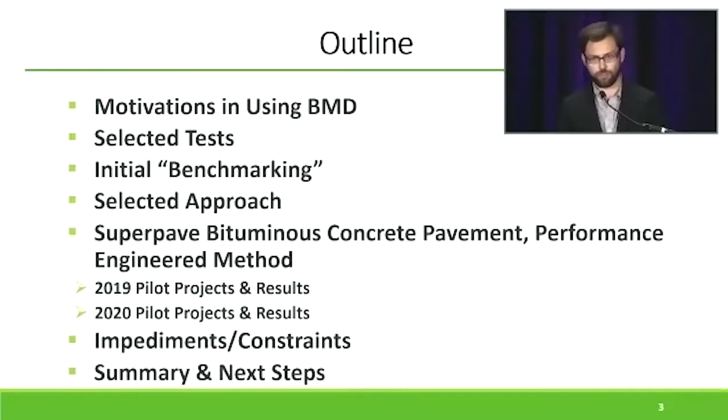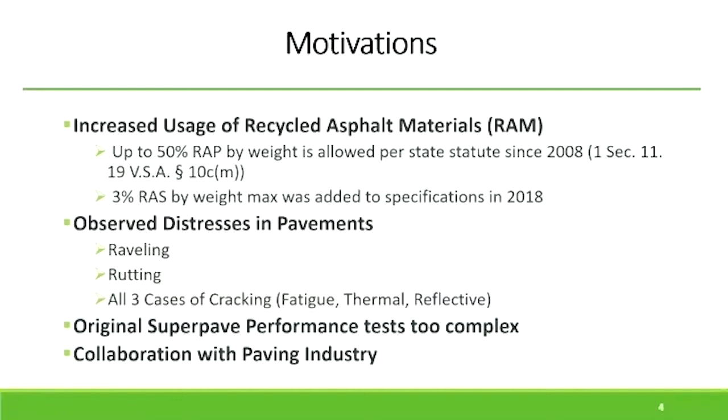So the question is, why did we decide to move ahead with balanced mix design? Since 2008, under state law, we are required to allow up to 50% RAP by weight in our asphalt mixes. Since 2018, we have allowed up to 3% RAS by weight in our mixes as well. It's worth noting, as I will indicate later in this presentation, that most mixes have no more than 20% RAP in general because we have grade bumping requirements in our PG binder specification.

In addition, we were also seeing various distresses in our asphalt pavements, mainly raveling and rutting on our limited access highway system, our interstates basically. We were also seeing all three cases of cracking: fatigue cracking, thermal cracking, and reflective cracking. This is because we are, I like to say, an unintentional composite pavement state on our regular roadways, because there are concrete slabs dating back from the 1930s and 1940s placed below the asphalt pavement layers. And as most of you can attest to in the room, what we found with the original performance tests developed with the Superpave mix design methodology was that they were too complex and the equipment was too expensive. So in Vermont, we only implemented the volumetric aspects of Superpave.

And lastly, and most importantly, we wanted to increase the amount of collaboration that we have with the asphalt producers and amongst ourselves, because we share a common cause: ensuring that the right materials are used at the right cost and at the right time.

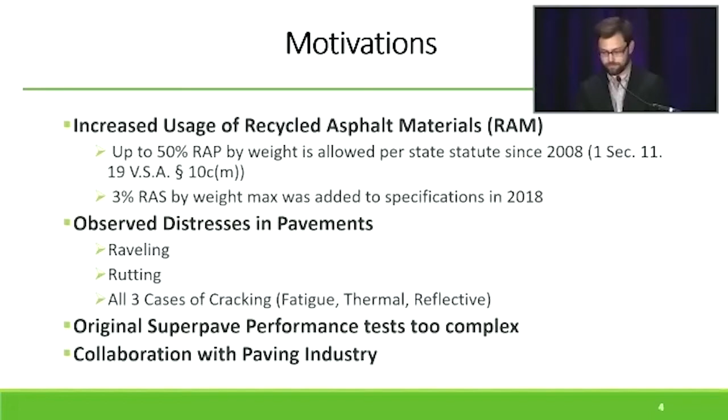Now I'll talk about the balance mix design tests that we chose. In 2015, we purchased the Hamburg wheel tracker and chose that test to evaluate rutting and moisture susceptibility, primarily because it is a torture test in principle on HMA mixtures.

We suspected that raveling was moisture susceptibility related. In addition, we also shared a mutual dislike with the asphalt paving industry in Vermont regarding the TSR test parameter performed in accordance with AASHTO T283. We thought it did not reflect the actual moisture susceptibility and stripping issues we were seeing in Vermont.

For the cracking side of balance mix design, we chose the Illinois Flexibility Index because it was identified as a candidate test for thermal and fatigue cracking in NCHRP project 9-57. At the time we made this decision in 2017, we were anticipating an increase in our recycled asphalt materials content, particularly RAS, which we did implement in 2018, as I noted before.

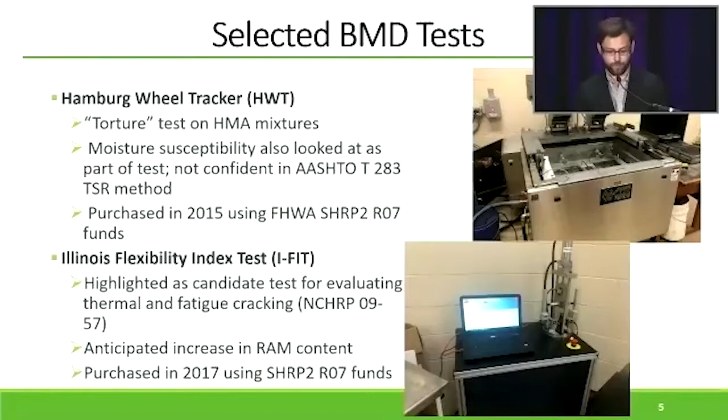We did look at the other two SCB tests, the Louisiana and Minnesota tests, but found them unsuitable. The Louisiana SCB is not used outside the southeastern US, and we considered the Minnesota SCB test too expensive for what we needed, because it would require purchasing an environmental chamber.

Next I'll talk about benchmarking, and upfront I'll say that benchmarking has been the most challenging aspect of incorporating balance mix design in Vermont.

We began sampling plant-produced mixtures in 2015, soon after we purchased our equipment. Essentially, we reheated specimens up to compaction temperature.

Initial specimens were gyrated to 60 millimeters per T324, the AASHTO procedure, but since last year we've been gyrating to 62 millimeters per feedback from our paving association meetings.

We initially did testing at various temperatures ranging from 40 degrees Celsius to 55 degrees Celsius, but then in 2016, FHWA suggested we test all specimens at 45 degrees Celsius due to the climatic conditions in Vermont and to align with procedures in neighboring states, Maine and Massachusetts.

After we presented our initial data in the winter 2017 meetings with our paving association, the producers began split sampling plant-produced mixtures and following the same fabrication procedures we were using, assuming they had Hamburg equipment in their labs. Almost half of the producers as of this year now have Hamburg equipment in their possession.

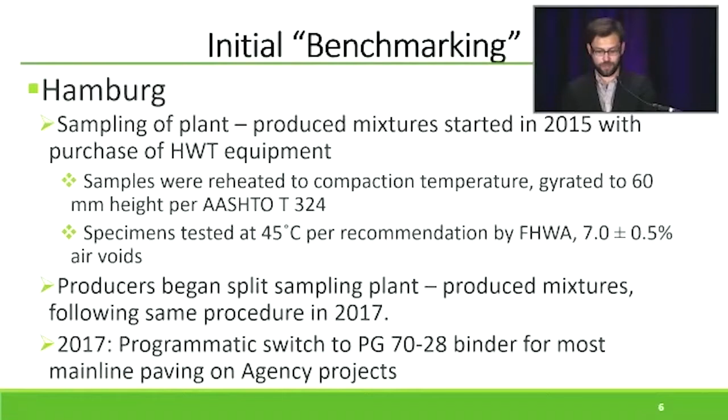Also in 2017, there was an executive level decision to mandate the use of polymer modified binders for all agency paving projects moving forward. Because of concerns in our paving association meetings regarding the MSCR test at the time and tank storage requirements, we decided the simplest path forward was just to specify PG 70-28 binder as a baseline.

Allow me to go over the 2015 and 2017 data briefly. Most of the data from 2015 and 2017 consisted of varying PG binder grades, as indicated on my slide. All the data from 2015 wasn't entirely tested at 45 degrees Celsius.

For that reason, along with the fact that most of the softer binder mixes tended to fail at 12.5 millimeters before reaching 20,000 passes, in addition to our programmatic switch to PG 70-28 binders, we ended up not using that data in constructing our pilot specification.

Now I'll talk about the 2018 data. As you can see, the average and standard deviation rut depth for mixes with PG 70-28 binder was 4.1 millimeters and 2.22 millimeters. For PG 58-28 binders, it was very close to hitting 12.5 millimeters rut depth as an average.

Not shown on this slide is the average rut depth and standard deviation for our 9.5 millimeter mixes, which we use as our wearing course. That is 6.85 millimeters and 4.15 millimeters as a standard deviation. I'll get into detail about that a little later.

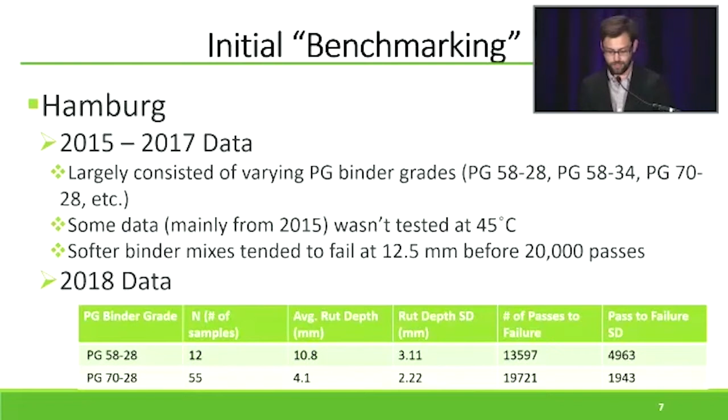So for our initial benchmarking of the iFit, we began sampling plant-produced mixes in 2018. All procedures in the AASHTO method were followed, with the one exception being that we were gyrating specimens directly to 50 millimeters instead of fabricating 160 millimeter specimens and then cutting 50 millimeter slices out.

That was because we were on the fence about whether we wanted to purchase a tile saw or not. We eventually did during the middle of the construction season, but in our first attempt at following the proper procedure, one slice of the 160 millimeter specimen ended up being 52 millimeters thick on one side and 48 millimeters thick on the other. That was an oversight on our part, and we realized we needed to purchase an additional jig, which we did. After some trial and error in winter 2019, we have been following the proper AASHTO procedure ever since, starting in the 2019 season.

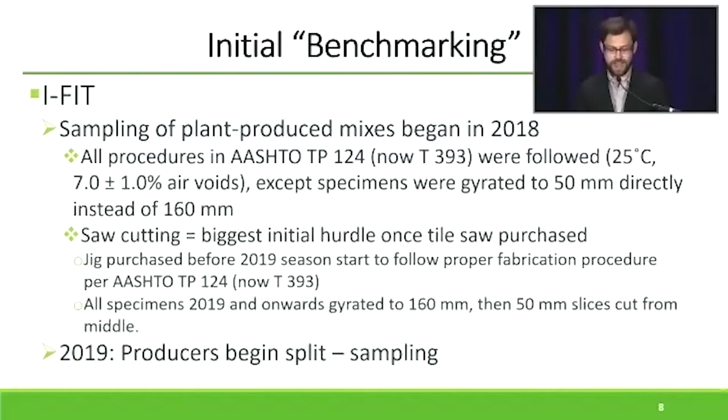Likewise, the producers began split sampling of plant-produced mix for iFit and following the same procedures. We were assuming they had the equipment, and as of a few weeks ago, half of the producers in Vermont now have iFit test equipment.

So the 2018 data for the iFit, like I noted before, was entirely consisting of specimens that were fabricated directly to 50 millimeters. It's also worth noting that the majority of results from 2018 consisted of mixes with 20% RAP, and there were no virgin mixes used whatsoever.

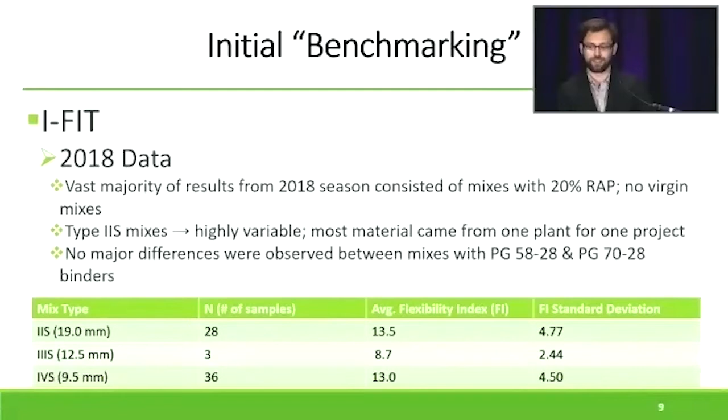It's also worth noting that as you'll see with the type 2, which is our 19 millimeter mix, as you'll see in the table, the average flexibility index was 13.5 and the standard deviation was 4.77. And that we thought was alarming, and we realized that was because most of the material came from one specific plant for one specific project. It was also worth noting that we did not see any major differences between mixes with PG 5828 and PG 7028 binder.

So based on this initial benchmarking, what we concluded was that we didn't have enough reliable data for our 19 millimeter or 12.5 millimeter mixes to include them in our pilot specification. So we ended up using only our type 4S 9.5 millimeter mixes if they were being used as a wearing course in our specification. And we were comfortable with the numbers we were getting out of the Hamburg, but we wanted...

We wanted the mixes, or we wanted the FI criteria to be strict, if you will, such that the mixes were a little bit more soft in general. So we did that. In order to develop our criteria, we just used the average and standard deviation and raised or lowered the bar accordingly based on which test was being done.

We also realized in our discussions in our Winter Paving Association meetings that plant mix lab compacted specimens are not the same as lab mix lab compacted specimens, and that we needed data to represent conditions at every point in the mix design, during the mix design stage, if you will, meaning specimens for balanced mix design needed to also be tested in the same way that mix designs are generated.

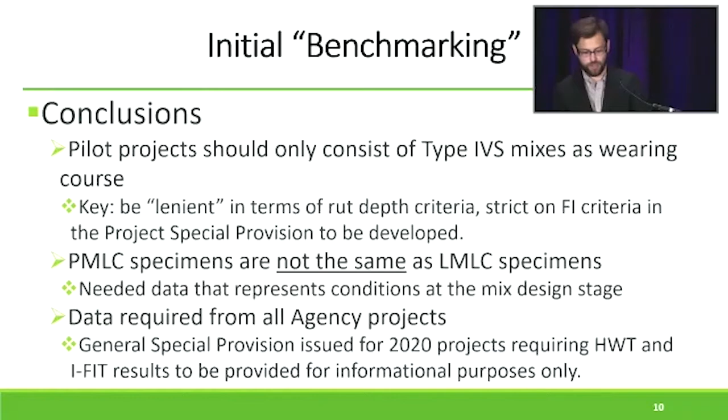So we issued an addendum, which in Vermont we call a general special provision for all projects beginning in 2020, requiring that Hamburg and IFIT results be provided for informational purposes only, such that we can capture mixes that we were not split sampling or anything of that nature. And like I noted before, benchmarking has ended up being the most time-consuming aspect overall, and we're still doing it to this day.

So now I'll talk about the mix design procedure in Vermont. In Vermont, it's largely a paper check overall, but we do approve the constituent ingredients like the PG binder and the aggregate sources on an annual basis per our quality assurance program. We used to require mixed design specimens to be provided or shipped over to the lab for approval, but we found that to be redundant at some point.

We generally look at air voids and VMA and ensuring that the gradation and aggregate consensus properties are compliant with our specifications and the AASHTO standards. We have not been able to distinguish a direct link between designing to 4% air voids and our observed pavement distresses.

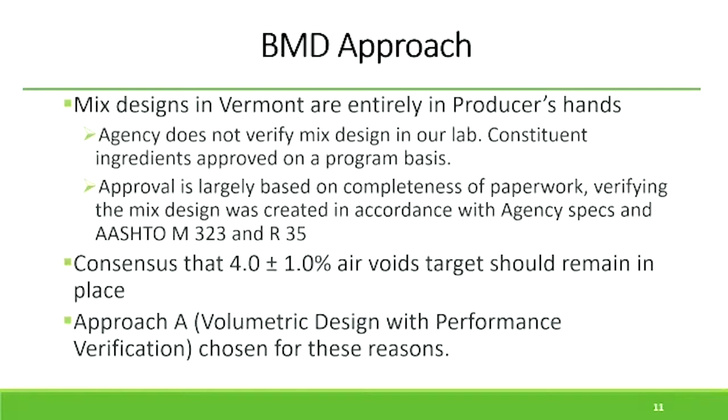So we haven't seen a reason to adjust our 4% air voids target for mixed design approval as part of this balanced mix design. And for these reasons, we've chosen approach A as part of our specification, which is volumetric design with performance verification.

So now I'll get into the details regarding our special provision.

We developed the same criteria for both mix design and mix production, and we realized in hindsight that was not the best idea. For the Hamburg, we specified a maximum rut depth of 10 millimeters overall and a stripping inflection point minimum of 15,000 passes. For the iFit, we specified an FI of 10.0 minimum. We also eliminated TSR testing completely, largely based on findings in New England Transportation Consortium Project 15-3, which validated our concerns that the TSR test parameter was not reflective of moisture susceptibility and stripping in Vermont.

For our pilot spec, we decided to do a percent within limits approach for QA. We set an arbitrary rejectable quality limit, or RQL, of 60% for the rut depth, SIP, and FI during mix production. If the PWL fell below 60% during production, corrective action would need to be done by the contractor to bring the mix back into compliance. If corrective action was unsuccessful, then the mix design that was used would be rescinded.

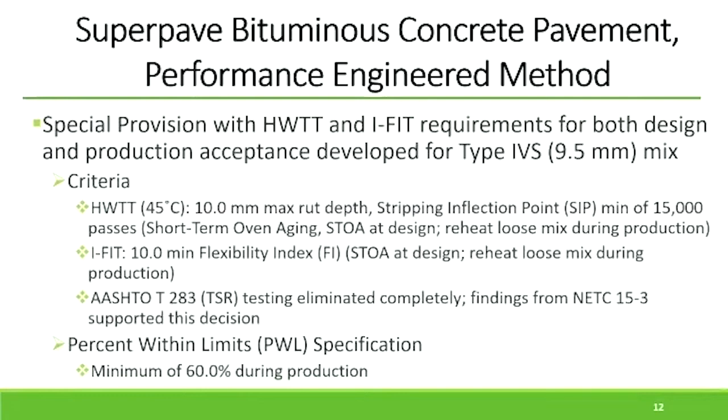I'm not going to spend too much time on these two pilot projects because, as you can see, the quantities were rather small, being under 10,000 tons. The key difference between these two projects was that one had a design gyration specified as 50, and the other had a design gyration specified as 65. One important thing to note is that in Vermont, our QA specifications define an air voids lot as 3,000 tons. So we decided to align the sampling frequency for performance testing such that there would be one set of performance test results for each air voids lot, in essence creating the performance test sublot.

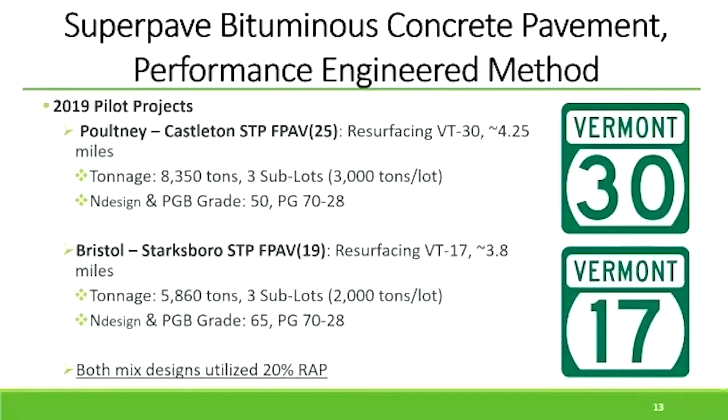However, on the second project, I made a mistake in determining the final tonnage that was going to be used. So the contract was amended via a written order by the resident engineer to change the sampling frequency and testing frequency for our BMD spec to 2,000 tons per lot in order to yield 3 sublots to calculate a PWL.

For the mix design on the first project, the rut depth and SIP were fairly well. It's worth noting that the SIP for this project was basically spit out from the contractor's Hamburg machine directly, and the flexibility index was 17.2. As you can see with the results during production, the mix was generally softer overall. The PWL of 67 for the stripping inflection point was likely due to the fact that the very first sublot ended up stripping below 15,000 passes, and we cannot explain why that occurred, given that the mix design did not strip whatsoever.

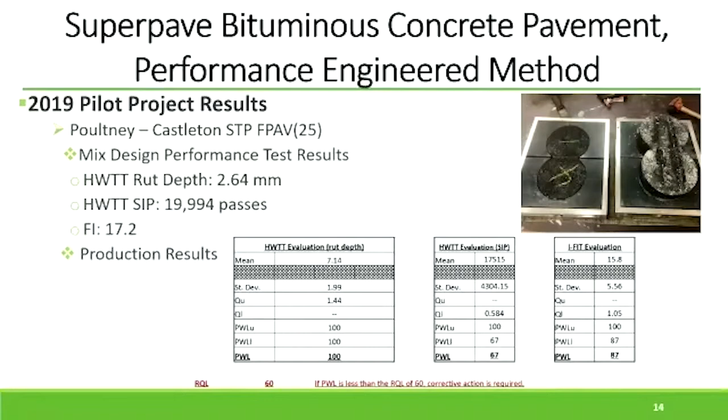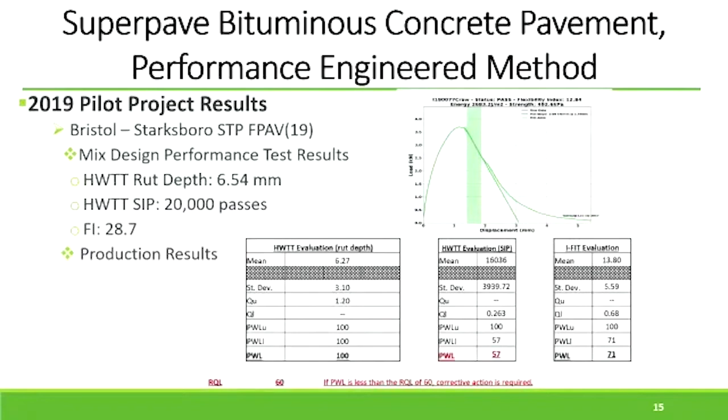For the second project, interestingly enough, the average rut depth was 6.5 millimeters, which we found interesting considering that this project specified 65 gyrations, whereas the first project specified 50. The FI was extremely high, but as you can see during production, the FI became something more realistic. Again, the stripping inflection point PWL during production was 57, which was below the RQL. But by the time we calculated that PWL, we were not able to enforce the corrective action mechanism in our spec because production had ended on that particular project.

From 2019 and 2020, we took another look at the special provision, made some minor adjustments to the language to address some issues that we found. We also identified a larger project for the 2020 construction season. This new project ended up being close to 27,000 tons overall, which yielded 9 sublots of performance test results. Design was 65 gyrations, and like the first two projects, producer Pike Industries chose to utilize 20% RAP.

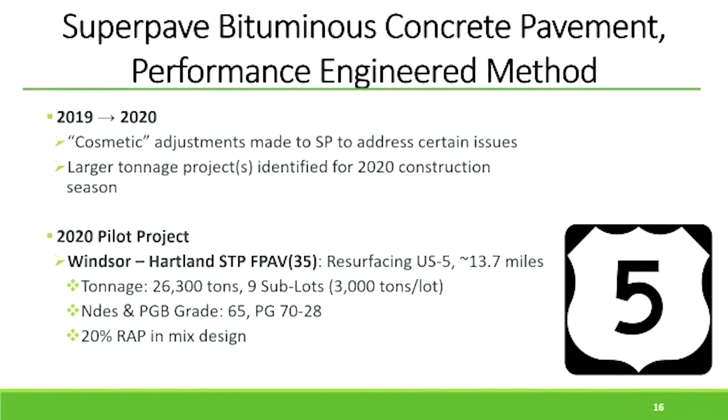During the mix design, results overall were fairly good and met the specification. During production, everything had a PWL of 100, but as Cheng will note in his presentation, there were some concerns that we do need to address further down the road.

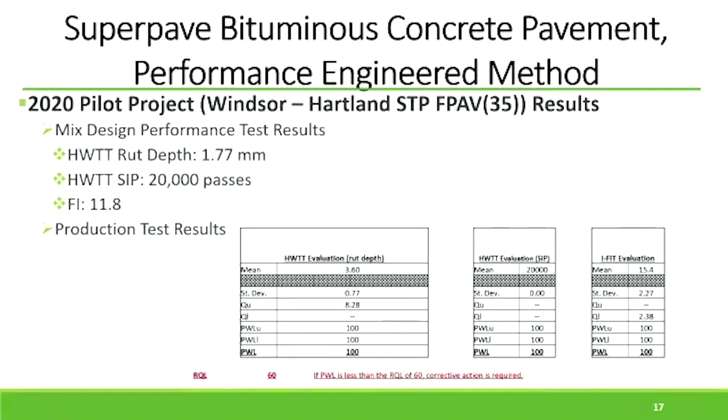So there are some impediments and constraints to using the Hamburg and the iFit in mix production overall. For us, one of the issues was data retention. For the project in 2020, there was a network outage issue that caused the first sublot of Hamburg results to not save in real time as the test was being run. Because of that, we basically tossed out the first sublot from the PWL calculations, because that would have messed everything up, and we only treated the results for the first sublot as investigative only.

In addition, we sometimes see noise in our Hamburg test equipment in one of the wheel path measurements, and we've attributed that to an electrical issue in one of the wheel path LVDTs. This has been a recurring issue for us since the 2017 season. The data from the 2017 season was not necessarily used in any data analysis because we found the data to be unreliable when the noise was most prevalent.

Another issue we found was that turnaround time in mix production is also a problem. In Vermont, under our mat density spec, which involves testing roadway cores, acceptance testing must be turned around.

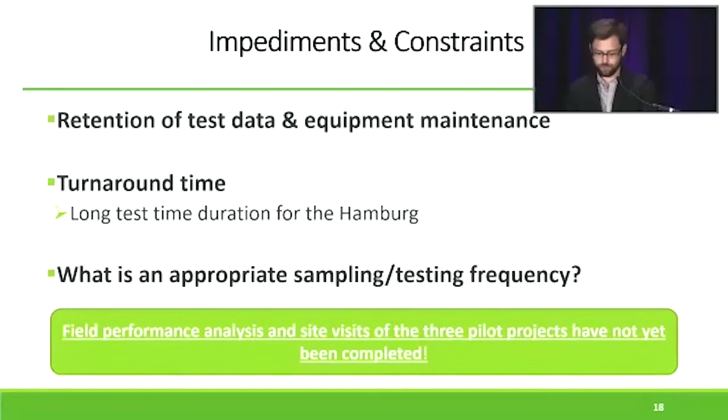So in conclusion, the special provision that we piloted is unofficially on hold. We're not using it this time until we focus on other specification changes we're making, including a tiered quality assurance approach for HMA, and ensuring that everything for mixture testing will have a pay factor tied to it.

We will also be incorporating the delta Tc parameter for our PG binder specifications, and move ahead with specifying the Multiple Stress Creep Recovery PG binder grading system under AASHTO M332. Right now we're doing AASHTO M320, as you can probably guess.

So for performance testing, we are looking at the IDEAL-CT as a surrogate test during mix production, or even as a replacement to the iFit for mix design approval. We're also going to start looking at the IDEAL-RT as a surrogate test for the Hamburg during production. We've also begun testing roadway cores in the Hamburg, because what better way to determine rutting and moisture susceptibility than by using samples representing in-situ conditions after placement.

We're continuing to benchmark all mix designs, as I noted earlier, as part of designing a go, no-go specification for mix design approval. In addition, we're in preliminary discussions with producers and third-party labs, and possibly with other state DOTs in the New England region, to conduct a future round-robin study on performance tests.

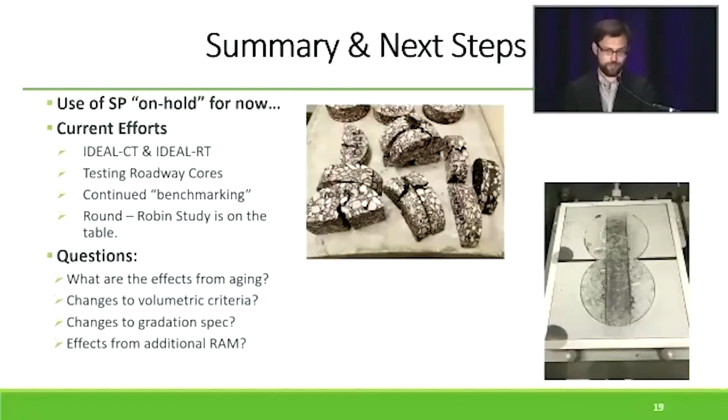So again, I want to thank everyone for giving me the opportunity to speak today, and I will hand it off to my colleague Derek to introduce our next speaker.

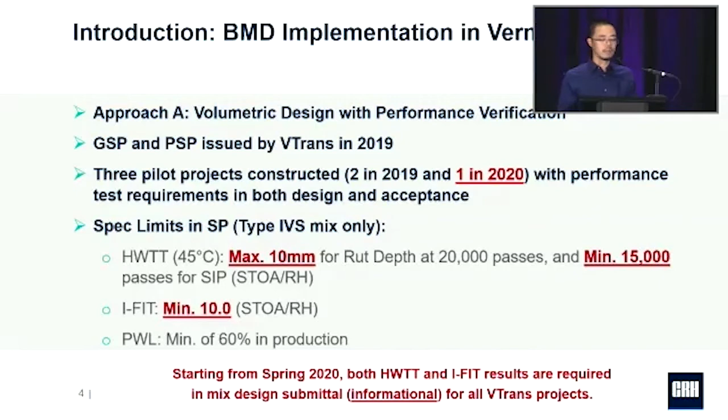Regarding the balanced mixed design effort at Pike, we first purchased the Hamburg machine for Vermont QC in 2017 and bought the IFIT jig along with the saws associated with this test in 2019. At that time, we also bought another set of test jig for the ideal CT test, which turns out to be one of the very popular cracking tests across the country today. Earlier this year, we bought another set of hydraulic machine which can run both IFIT and ideal CT and set it up in one of our Vermont quality control labs.

We have our senior QC technicians trained to run these performance tests. Running those tests is pretty simple and straightforward, and minimum training is needed. However, interpreting the data and understanding the data took a little longer, specifically for the IFIT data out of the test jig and the tablet, since that needs some extra data manipulation through the Illinois IFIT program. So that part took us a little longer before getting used to it.

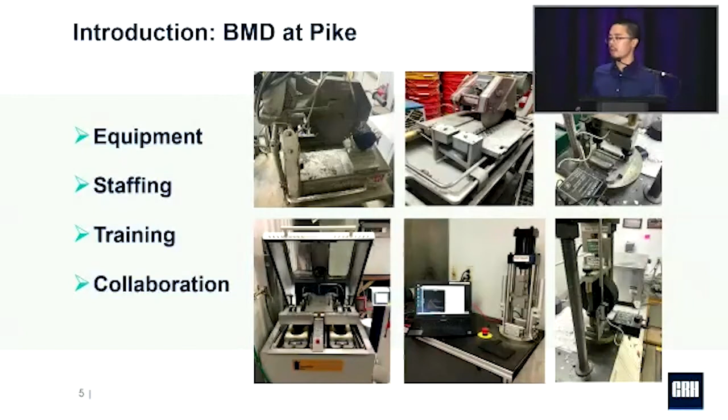Also, we've been working very proactively with VTrans on the split sample testing, the data sharing, and also had a lot of great discussions on the specification development over the winter meetings.

I'll talk about our recent experience from a pilot project that we constructed for VTrans in the 2020 season. The project is Windsor-Hartland Resurfacing Project as part of US 5 with a total length of 13.7 miles. It was constructed in summer 2020 with a total tonnage a little bit over 26,000 tons. The job was divided into 9 lots with 3,000 tons per lot. The mix used was a type 4 9.5 millimeter 65 gyration mix with polymer modified PG70-28 binder.

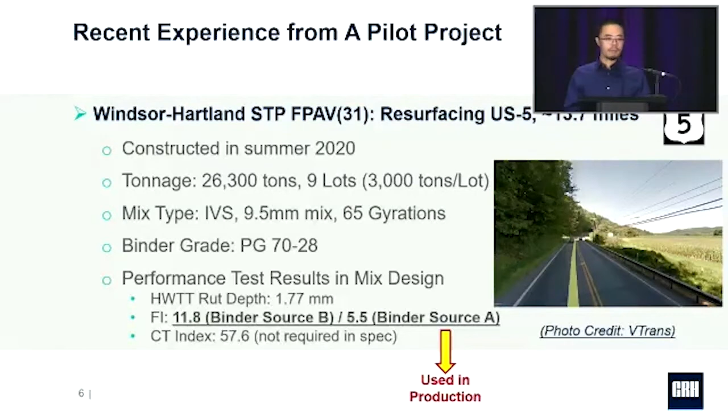The performance test results in mix design showed that the mix had an average Hamburg rut depth of 1.77 millimeter, very decent, and an FI of 11.8 using binder source B at the design. However, later in the production, we switched the binder source to another source, A, across the whole production. Later during the off season, we gathered the raw materials and ran the lab verification on the same design using binder source A, and found that the mix with binder source A actually gave a much lower flexibility index compared to binder source B. At that time, we also checked the CT index of the mix, which turned out to be 57.6.

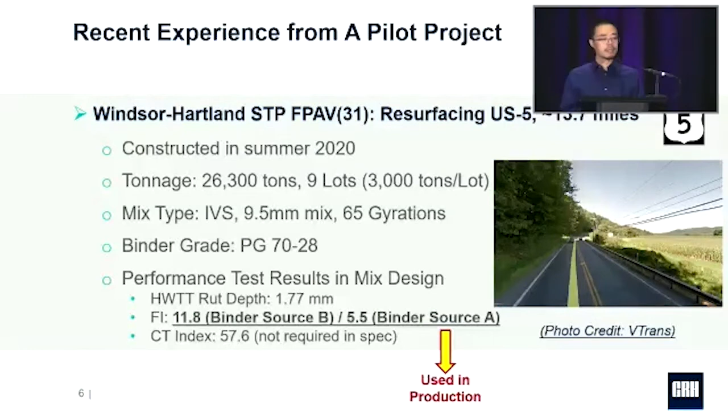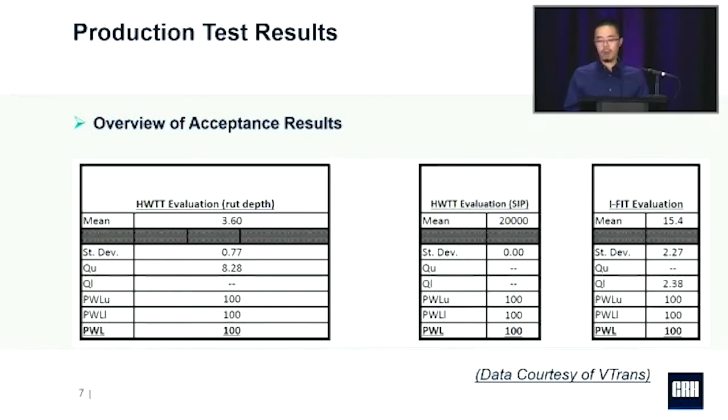During production, we worked very closely with VTrans on split sampling the mixes across all 9 lots, and also worked with them on the results comparison. VTrans completed their test first, and we strictly followed their practice, including the sample reheating and sample fabrication, to minimize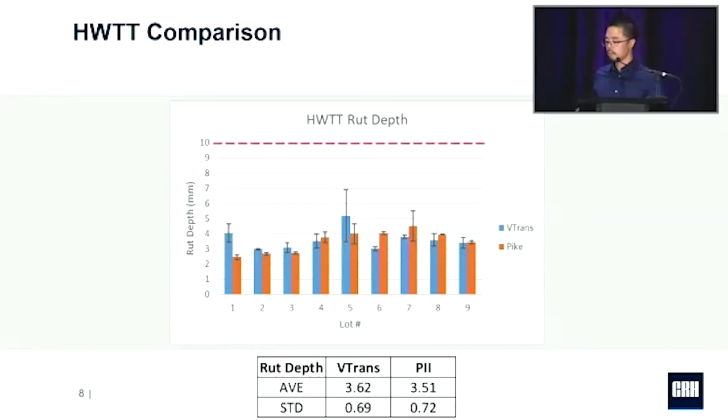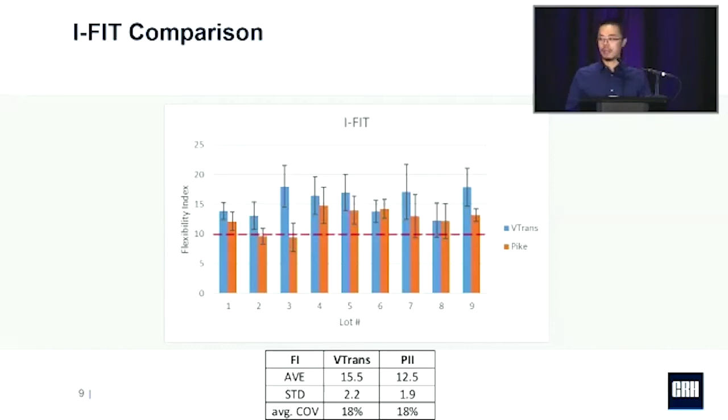Some of you probably have noticed that there's a significant difference between the production numbers and the design numbers. Here's a quick overview and direct comparison of the performance test results between the production mix and the design mix. So you can see from the table that on the rutting side, the rut depth out of the production mix gave a much higher value compared to the design mix, almost double.

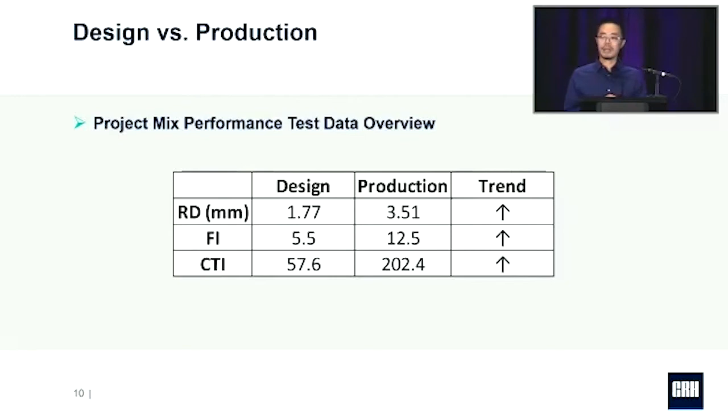And on the cracking test side, both cracking tests, the IFIT and the Ideal-CT, on the production mix actually yielded a much higher number compared to the design number as well. It seems that the production, at least out of this pilot study, tends to be softer than the design mix.

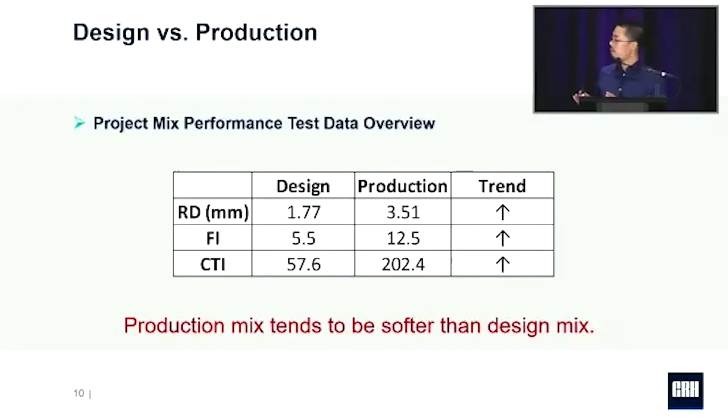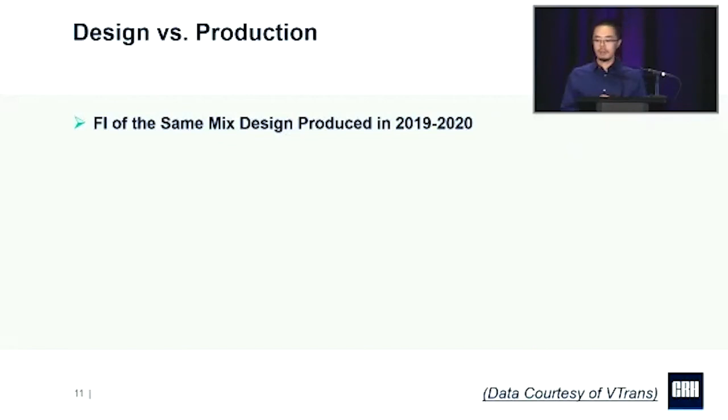In order to further verify this trend, we dug into the database, the mix performance test database shared by VTrans, and identified all the mixes that shared the same mix design as the pilot project we produced in the 2019 and 2020 season. Here's what we found out of the IFIT numbers. The design number is represented by the red horizontal line, which is 5.5, if you recall. And all 13 mixes that we were able to find all have values higher than 5.5, the design number.

In fact, there are many factors in production that can affect the mix performance test result, such as the aging condition, which includes the silo condition and also the silo storage time; the production variation, specifically on the AC content and the 200s; the switchover of the asphalt binder source; the aggregate property change; and even the RAP source change. All these factors can affect the BMD test results.

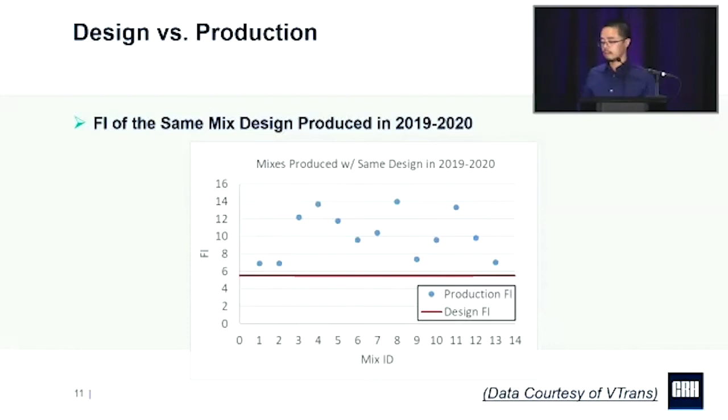I want to specifically talk a little more about the impact of asphalt binder source, as switching the binder source is pretty common among paving contractors, depending on the availability and cost of the materials. However, unlike the superpave volumetric design, the balance mix design test result could be very different if a different binder source is used.

So in this figure, location number 2 is where the mix for the pilot project was produced. At that location, the gneiss aggregates are primarily used. As you recall, the binder source A, which was used in the design verification, yielded a much lower FI value compared to binder source B.

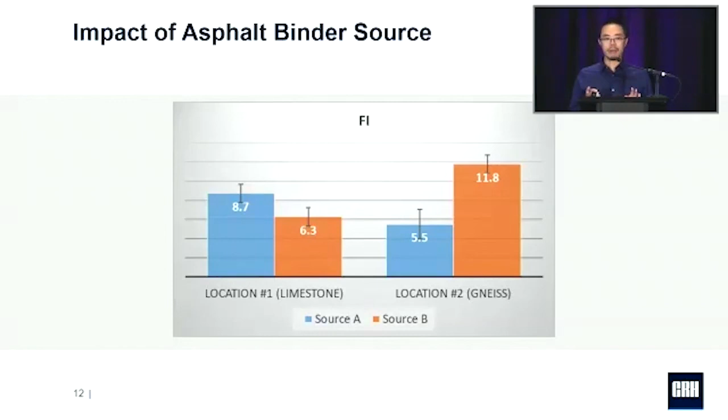Something even more interesting that we found later is when we took the same binders from these two sources and ran another verification at a different location where limestone aggregates were primarily used, we noticed the ranking was completely reversed. This time, binder source A actually gave higher FI values than source B. So this tells us there may not be a consistent trend when evaluating the impact of asphalt binder source across different locations.

As aggregate source could also matter, caused by the aggregate surface chemistry, the aggregate absorption, and other physical and chemical aggregate-binder interface properties. All these could have an impact on the BMD test result. And such compatibility between the asphalt binder and the aggregates also needs to be considered during the BMD evaluation.

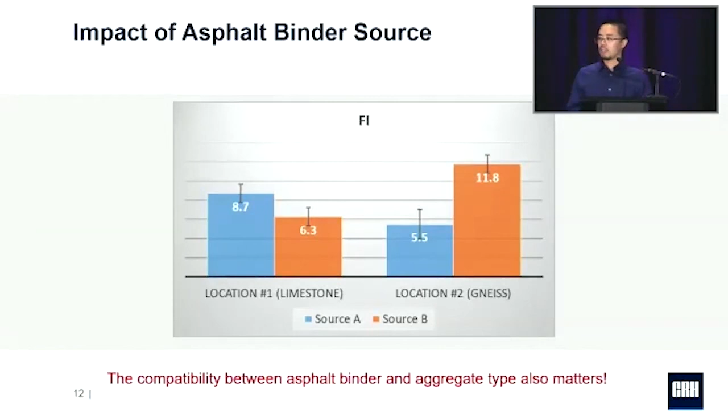Quick wrap up of the lessons we learned out of this study. First, the interlaboratory variability needs to be better understood. As we found, our Hamburg numbers line up pretty well with the agency numbers.

However, there's a significant difference between our numbers and agency numbers on the IFIT. Aaron has just mentioned that a round robin is on the table in Vermont, and we look forward to working with the agency on that.

The performance test result out of production mix could be very different than the design mix. We need to look further into this and do further investigation to see if it is mainly because of aging or other factors.

Also, binder source could have significant impact on the cracking test results, which has already been noticed by many agencies and contractors, I believe. It should also be noted that the ranking of different asphalt binder sources could also be different at different locations due to the different aggregate sources used.

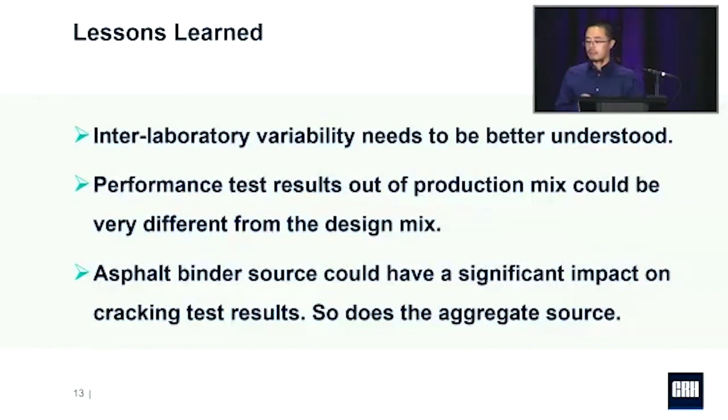Because aggregate source also matters during the BMD evaluation. Some additional thoughts: if the mix performance is not balanced or does not meet the specification, what can we do to improve?

Adjust the AC content. Seems very straightforward and always one of the first things that come into our mind.

Adjust the RAP percent, which is typically very effective in improving the cracking test result, although it may drive up the mix cost.

Changing the virgin binder grade, especially bumping up the binder grade and making the liquid stiffer, could be very effective in improving the Hamburg or rutting test result.

Adjust the aggregate gradation. I've heard stories from others that by switching from fine gradation to coarse gradation, their cracking test result got significantly improved.

Use the help of additives such as recycling agents. Actually, there were a lot of good discussions at AAPT meetings about the use of rejuvenator or recycling agent. With the further implementation of BMD and also better understanding of this type of product, I believe there could be opportunity between the paving industry and also the agencies to further look at this opportunity.